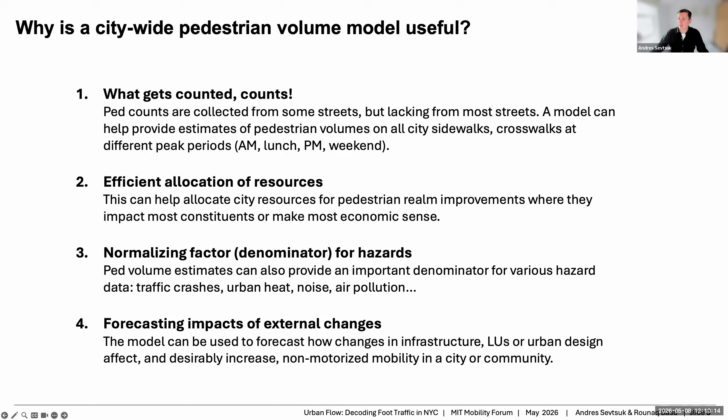So with that, I'll go through the framework we've developed. This builds on about 10 years of modeling work we've done in the lab and research group using urban network analysis, a very fine-grained traffic or mobility modeling set of tools designed explicitly for modeling pedestrians and cyclists over networks. It's been a plugin for various software platforms, and most recently it's a Python library that's openly available.

We use this software platform to estimate active travel in a three-step modeling process, which can then be combined with additional steps for impact assessment or design intervention analysis. As in all models, the first step is data collection and setup, which requires data on travel behavior, person characteristics, and the built environment where travel occurs.

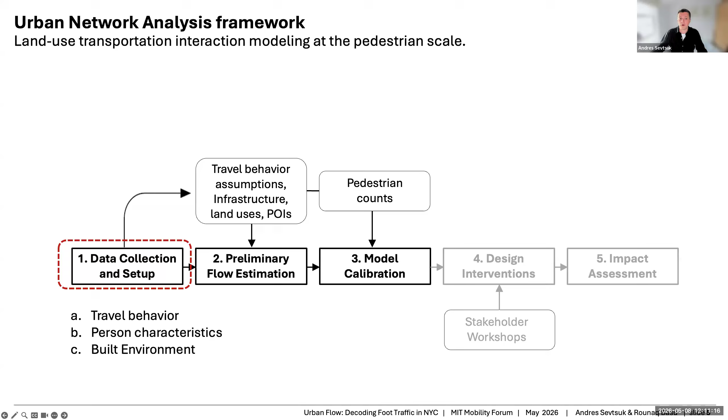For that, data usually comes from trip generation understandings, which inherently tend to be more biased towards auto trips. So a lot of our understanding of trip generation is very geared towards auto trips, but we're starting to understand, from various surveys and more recently travel surveys done on mobile phones, the travel demand for active mobility in more detail. There's also a wealth of information in such surveys about destination choices and how far people are willing to walk, all of which can inform the travel behavior side of the model.

On the built environment side, we need an understanding of where people can walk, that is the pedestrian infrastructure, and also what are the potential origins and destinations of mobility in a city.

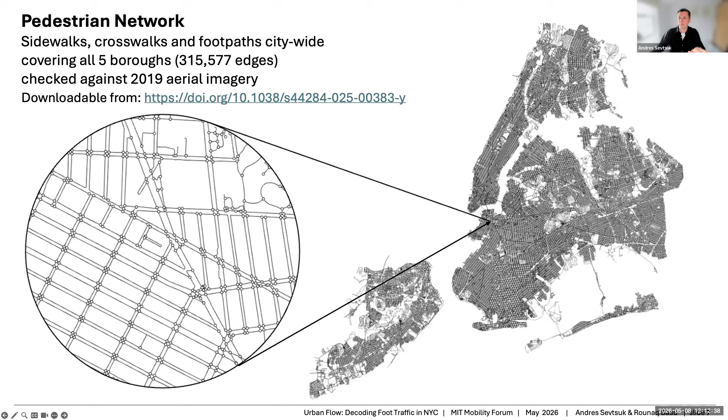For this particular study for New York, we combined various sources of data to develop the first citywide routable pedestrian network dataset. It's basically a dataset of sidewalks, crosswalks, and footpaths covering all five boroughs of New York. It was combined from various sources, including some of our own generation using computer vision, then humanly verified on 2019 aerial imagery to make sure it corresponds to conditions on the ground.

The land use data comes from various sources: ACS data, Info Group data about jobs and amenities, transit locations, transit station entrances, school locations, and so forth.

Once we've set up the data infrastructure, we use the UNA framework to develop preliminary estimates of pedestrian trips over the network.

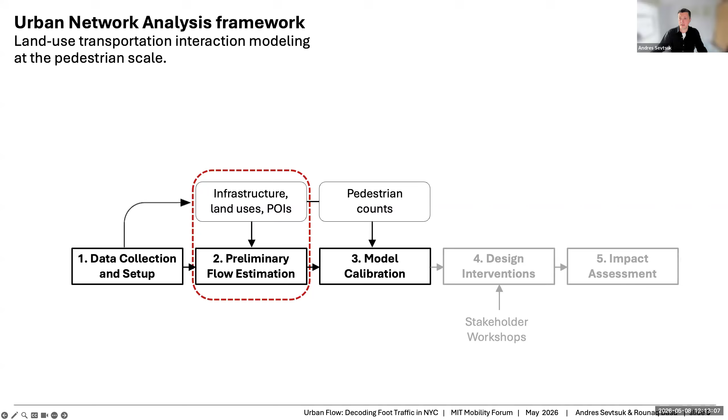There's a destination choice model, which uses the Huff destination choice model to allocate the probabilities of how many trips go to which entrance. There are 2 entrances in this particular subway stop on 176th Street. This can be expanded to not just the nearest subway stop for this trip type, but to all possible subway stops people can walk to around this particular home location. So there's a destination choice model that allocates trips between different candidate destinations depending on their accessibility and attractiveness.

And further, this can then be expanded citywide to examine one particular trip type here, which is the home to subway trip type. This will yield a preliminary estimate of how many, or where, trips would distribute on the street network or sidewalk network for the home to subway journeys.

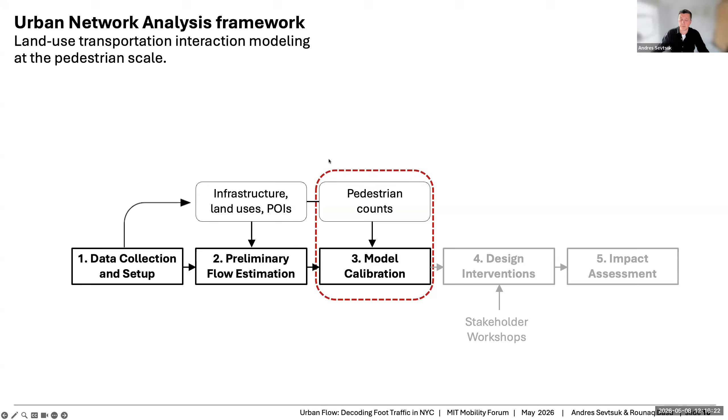Thanks, Andres. So I'll pick it up from the third step that we see, model calibration. By now, we've obtained estimates of how many people we expect to be walking on each link in the road network, given the surrounding land uses, given the network infrastructure and particular attributes of the network infrastructure as well.

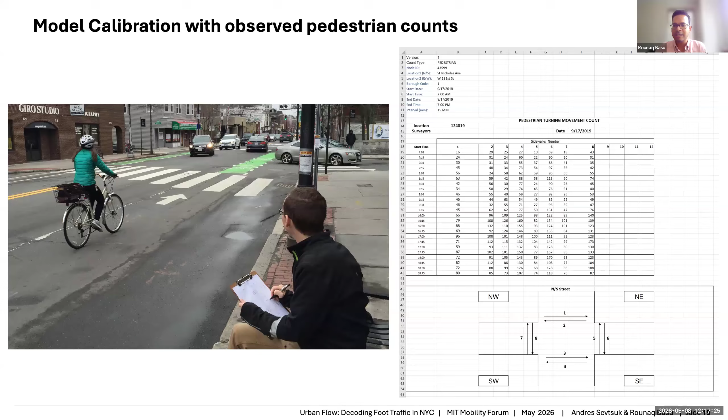Next, please. So we looked at over 1,000 locations where we had pedestrian counts collected on weekdays, and we also looked at different times of the day distributed across the morning peak, the midday, and the afternoon peak. And similarly, we also had just under 500 unique locations where we had data for weekend counts as well.

We focused only on count locations that had a reasonable number of pedestrians walking, and we defined that as at least 30 per hour, to weed out locations where we did not have enough people walking, which would serve as outliers in our model. And these data were from 2018 and 19, so that's pre-COVID, just keeping that in mind.

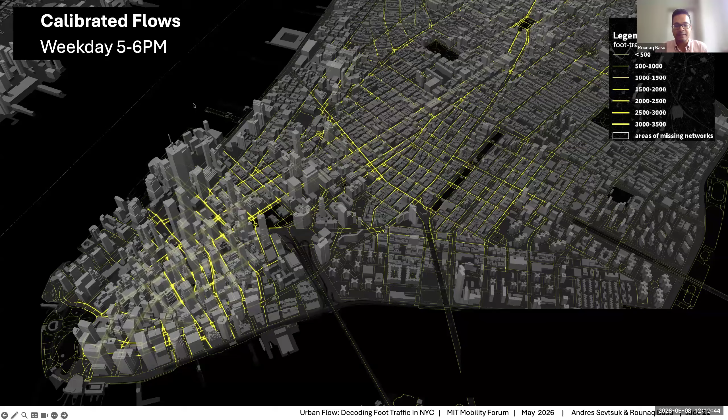And then we're going to show you a few maps looking at what these calibrated flows look like. So for example, this is a map showing weekday evening peak volumes, calibrated, across the entire city of New York. And then we can zoom in.

We can zoom in and look at particular links over here. So when we say links, it's not just the sidewalks that we see, both sides of the street, but we can also obtain estimates of the number of people who are walking for each crosswalk. That's really an innovative addition that we haven't really seen in previous literature on this part.

So I'll show you a couple of applications. Now that we have link level estimates of the number of people who we see walking, how can these volume estimates be used for planning and policy? The first application we want to highlight is going back to that first slide that Andres had. We can use these estimates as normalizing factors for hazard.

And I'll highlight an example that's relevant for Vision Zero, focused on safety. A lot of Vision Zero efforts recently have been looking at crash data and trying to identify hotspots where we find concentrations of crashes. These lead to the formation of high injury networks that we use for planning.

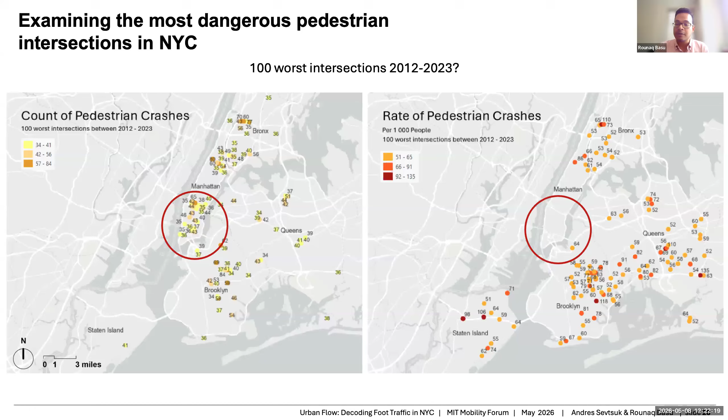But once we apply that normalizing factor, we see the hotspots emerge in locations where we also have higher concentrations of communities who have been historically marginalized, who do not have access to good transit. They need to walk to get to transit. They're at the end of the transit networks, and who also have very poor pedestrian infrastructure in terms of missing sidewalks or broken sidewalks and so on.

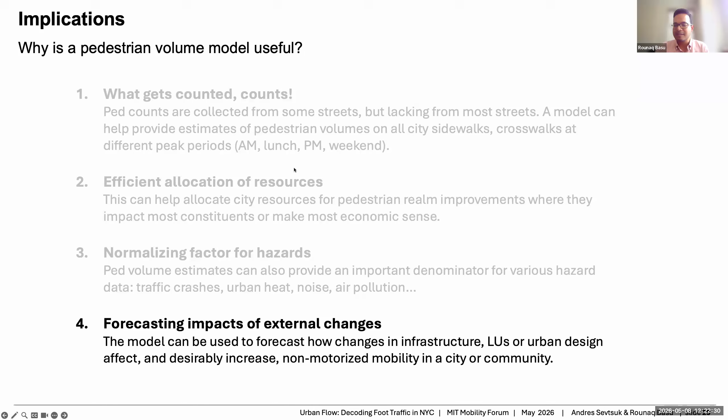And then the last application I'll highlight is how we can use this framework to forecast impacts of external changes. I saw a few comments in the chat where we were talking about pedestrian-oriented development. So we can look at pedestrian-oriented development using this framework.

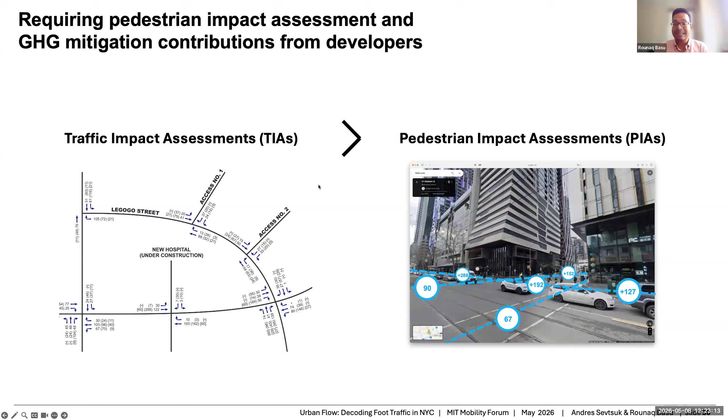We know that NEPA requires new developers to do traffic impact assessments. With this framework, we want to encourage cities and policymakers to require pedestrian impact assessments so that we can measure greenhouse gas mitigation contributions from developers. Perhaps we can provide tax incentives for developers to build in such a manner that more pedestrian and biking infrastructure and activity can be supported around those new developments.

And then finally, how do we connect the land use and transportation dimensions around pedestrian activity? Rather than thinking in the paradigm of trying to predict and provide, our framework allows us to change that paradigm and rather think about this in a manner of deciding and providing. So let's decide on what we want our target mode share to be. As Andres mentioned, right now in New York City, it's 41% of trips that are being done by walking. So let's say we want to achieve a target of 60%.

How do we enable that? What land use changes and where would be required to help us hit that target? So this framework can be used to engage in those kinds of scenario analyses. That's not to say that this model or any other pedestrian model out there is completely foolproof.